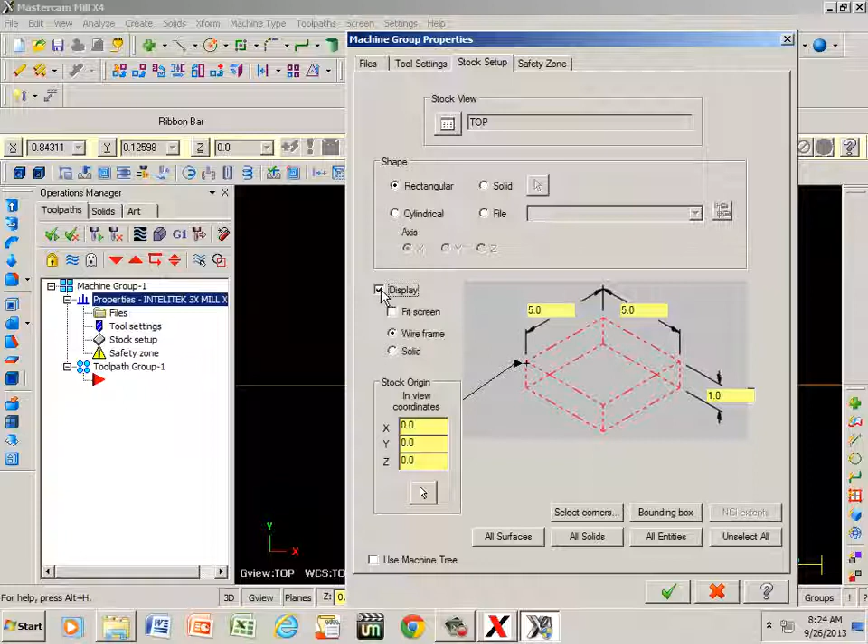I'm going to make a 5 by 5 by 1 inch thick. So if I just type in 5 tab, 5 tab, and 1 tab, notice that my origin or place of reference is in the center. So if I click here, I'm going to be machining off the bottom left corner, or programming from bottom left corner. Now I want to click on display and green check.

Now if I take the roller on my mouse and roll it back toward me, I can center my material in the center of the screen. I'm going to go to create and click on rectangle. Now if I get close to the bottom left corner, watch what happens. It's going to snap right to it. Bam. There it is. I take the left mouse button and hold it down and create a window larger than the red dotted line and click it one time.

Now here is my width or my x-axis, and here's my height or my y-axis. Let's type in 5, tab over, 5 again, tab, blue apply, green check. Okay, what I want to do is I'm going to create a pocket. So the easiest way for me to do that, I want it to be 3/4 of an inch away from all edges. So if I go to create, line, and parallel, right here I can type in 0.75.

And if I click this button here, my distance button, it's going to turn it red. That locks me in. So now if I click this line and go to the inside, do it the same way all the way around. Blue apply, green check. Now I need to go ahead and trim off this excess here. So if I go to my scissors, here's various options I have. I'm going to select this one, divide and delete.

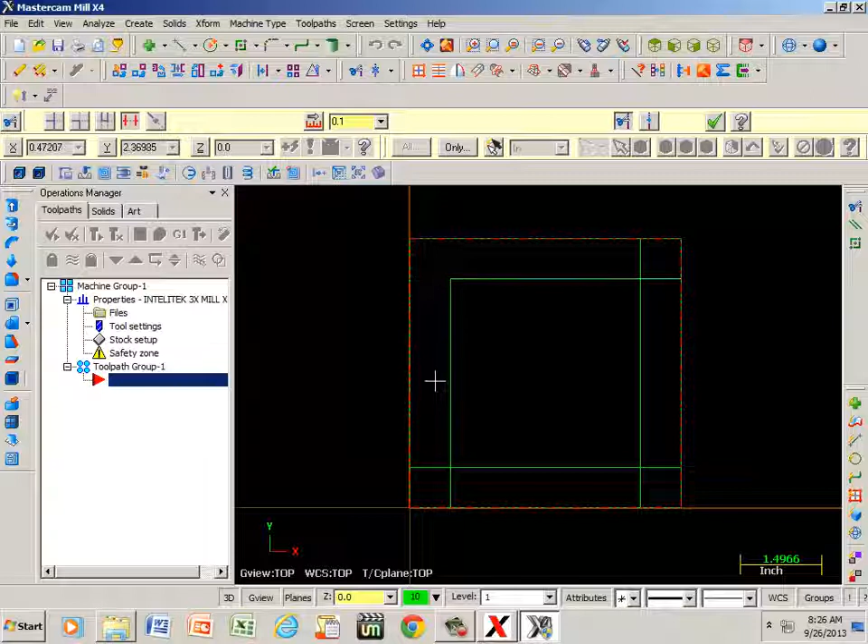So once I click that, I'm going to zoom in with the roller, and you see the dotted lines here. If I click here now, it goes away. There. Green check. Now notice I have right angles or square corners. So if I'm going to machine with the cutter, it's going to leave a radius. So I need to create a radius in these corners.

You do that by going to fillet entities. If you ever hover over anything in MasterCam, it will tell you what it is or what it does for you. This one is called fillet entities. So if I click that, it defaults at 1/4 of an inch. Well, I want these radiuses to be 3/8 radiuses. So if I click here and type in 0.375, I click this button here. Now if I click this line and I go to this line, it creates the radiuses for me. There. Blue apply, green check.

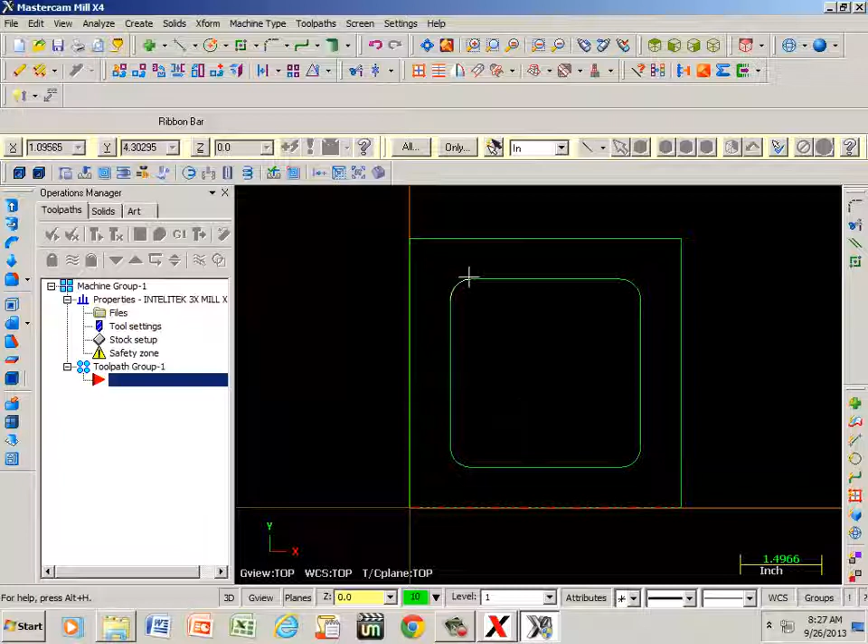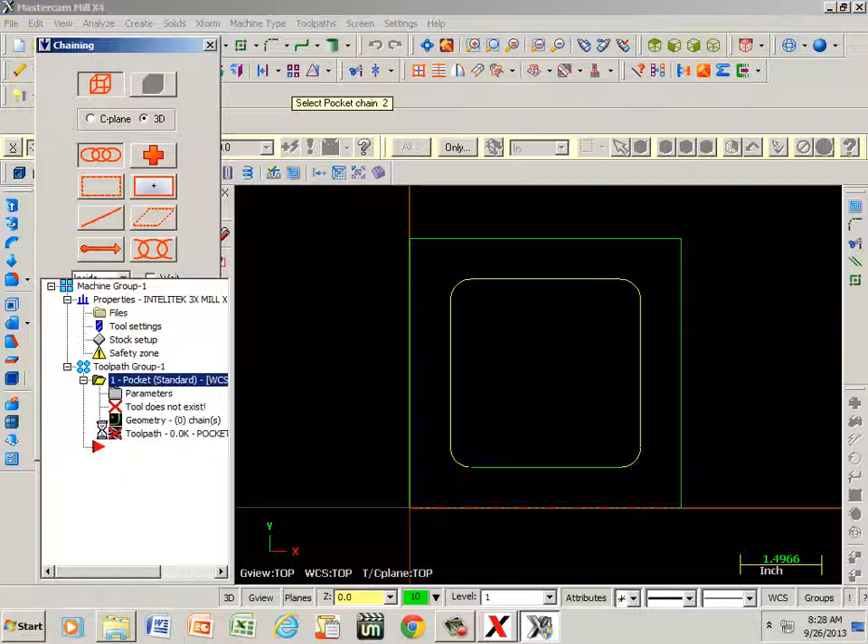Alright, now I need to go to tool paths. I need to pick a tool to machine this pocket out. So if I go to tool paths, scroll down until I get to pocket, and I'm going to name this pocket. That's my operation. Now if I click this line, notice it turned it yellow. That means everything's connected. Green OK. And I need to pick a tool.

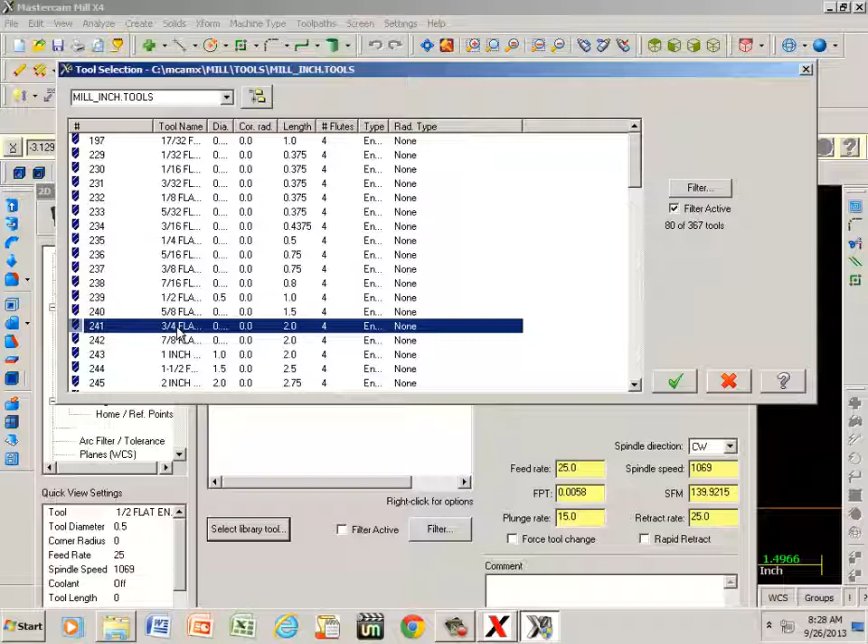Well, since that's a 3/8 radius here, the largest cutter that I could possibly use would be a 3/4 of an inch, or 0.75. So if I go to select library tool, here's my 3/4 flat. I'm going to double click that, and it's showing tool number 241. Well, I don't have 241 tools in my carousel on the CNC machine, so I know that my 3/4 cutter is tool number 7. So if I double click this, I can change that number.

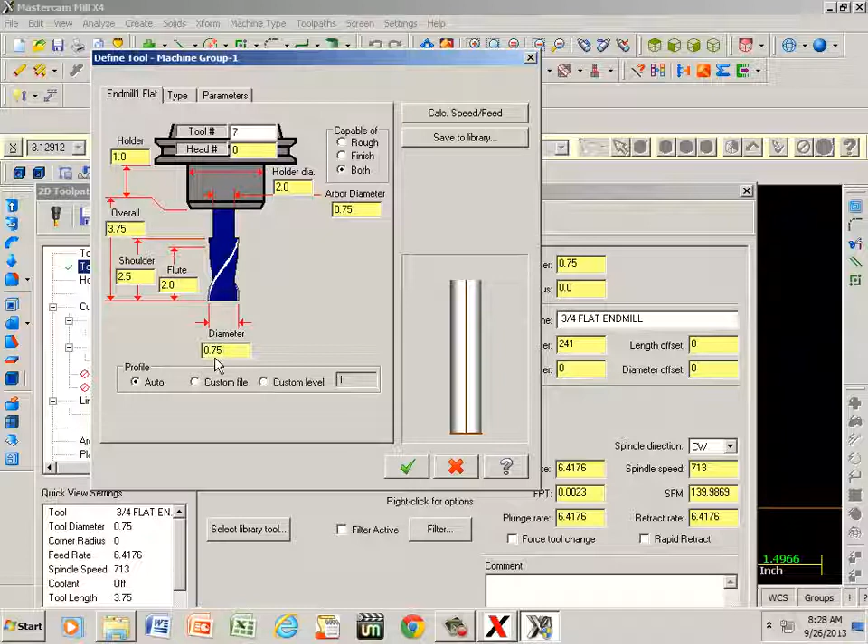Notice that we have 3/4 of an inch here. So we're still using a 3/4 cutter, but I renamed it tool number 7. We go to cut parameters, showing that we're climb milling, which is what I want. We are roughing, and I can pick whatever style I want. The fastest way of machining a pocket would be to go to true spiral.

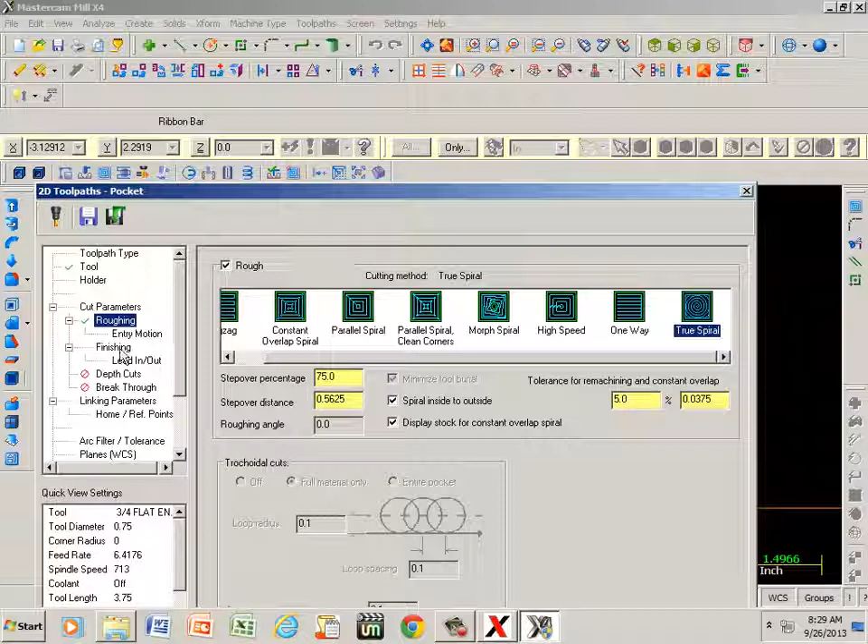So if I click on that, and I go to finishing, actually entry motion, here's helix and ramp. Helix is going to zigzag back and forth until it gets down to my depth of cut. Ramp goes 2 or 3 axes at the same time, simultaneously. As the Z is coming down, it's moving also in my X and my Y, or one of the other.

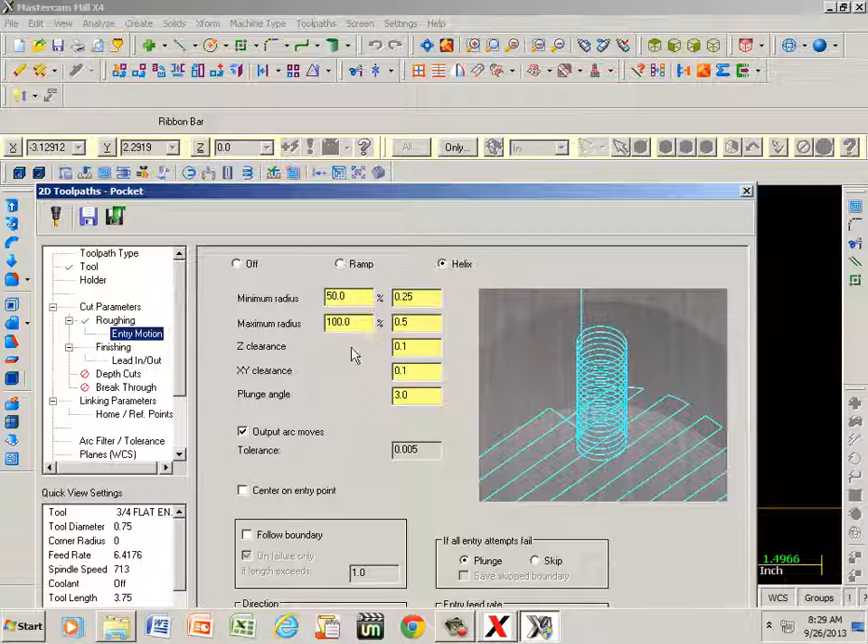Finishing is going to leave one pass, and it's going to save me 10 thousandths worth of material for cleanup. I can change that if I want to. I can change that to 50 thousandths or 2 passes at 25 or whatever.

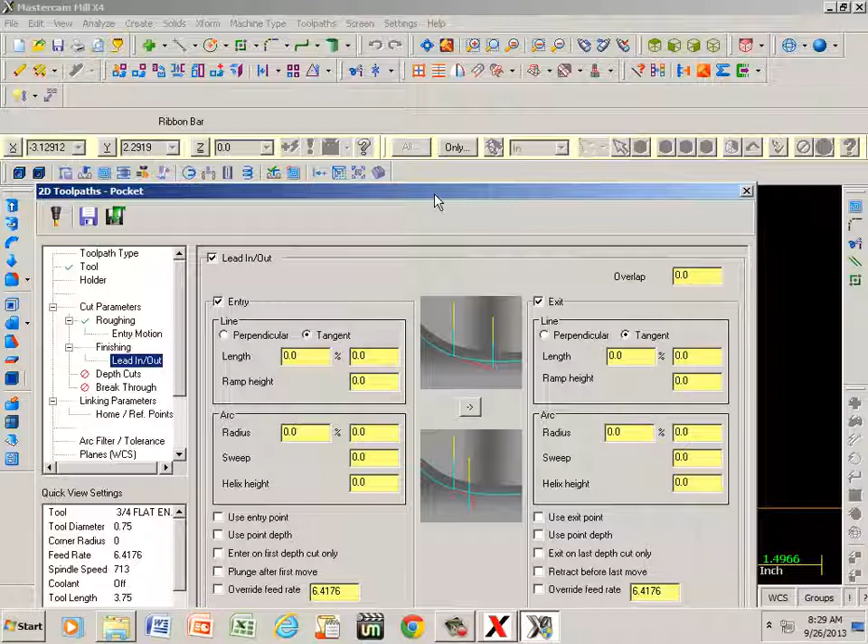Lead in, lead out. What that means is, as the tool is coming in, it leads in, it machines all the way around your pocket, and then it leads out, it goes down another 100 thousandths or whatever you want to take it, leads in, goes around, and leads back out. I'm not going to use that, so I'm going to uncheck it. It grays everything out now.

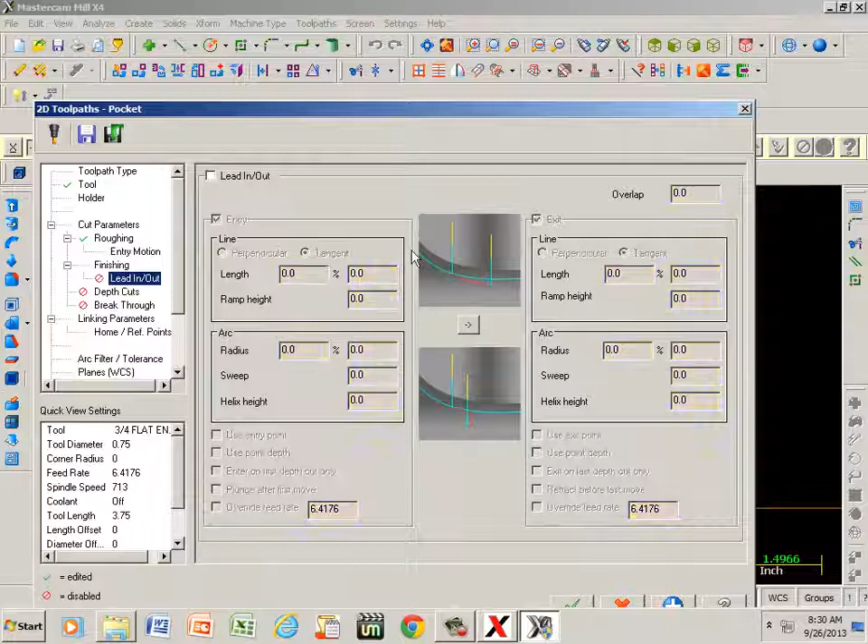Depth of cuts. I'm going to click that and tell it I want to go 100 thousandths per cut, 0.1, or I can give it more zeros if I want to. That's not going to change the value of that number. I'm not going to break through. I want to leave a pocket in there, so that's not even going to be an option.

Linking parameters, that's going to give me my total depth. Okay, we said that that's going to be 1 inch thick. I'm going to machine this 3/4 of an inch deep. So that's going to be minus 0.75.

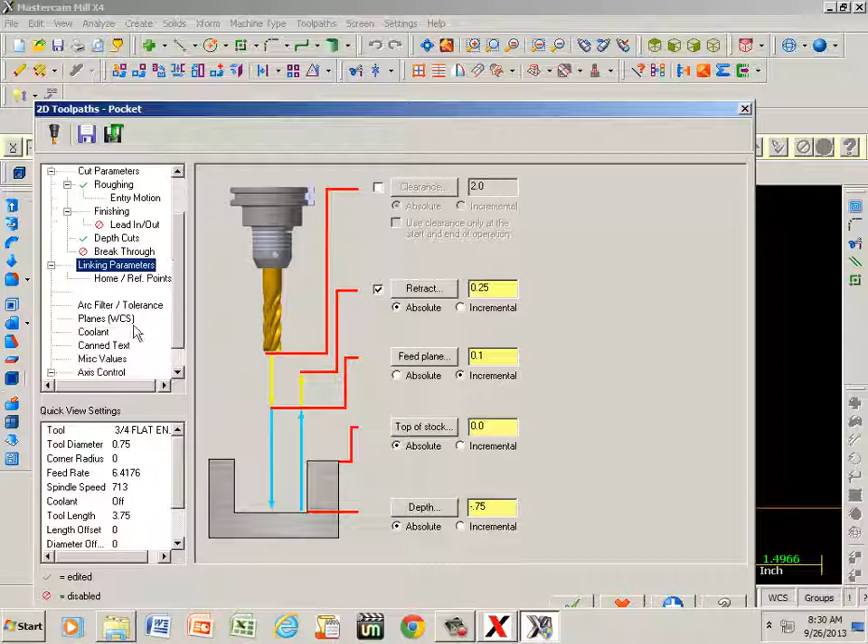If I want to turn some coolant on, I can go ahead and click on coolant and click on flood and turn that on. Well, everything's done. So I hit blue apply, green check. Here's my tool path. A lot of times that gets in your way, so you can hide it by hitting Alt-T on your keyboard.

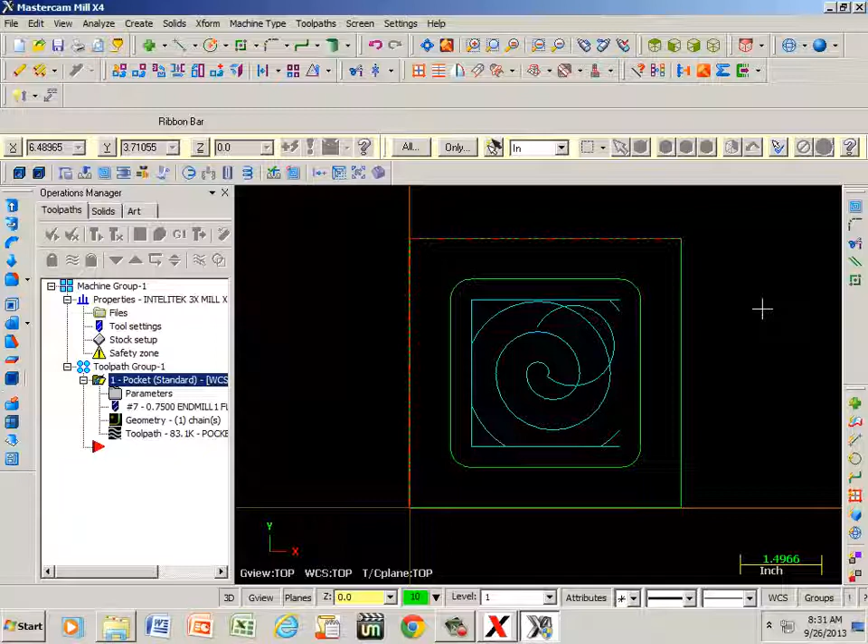One time shows me where it's going to start and machine around. One more time will hide it. Let's go to an isometric view. If I hit Alt F1, that's 100% zoomed in. I'm going to back off of it 25% by hitting Alt F2. Now here I can hit my verification and machine.

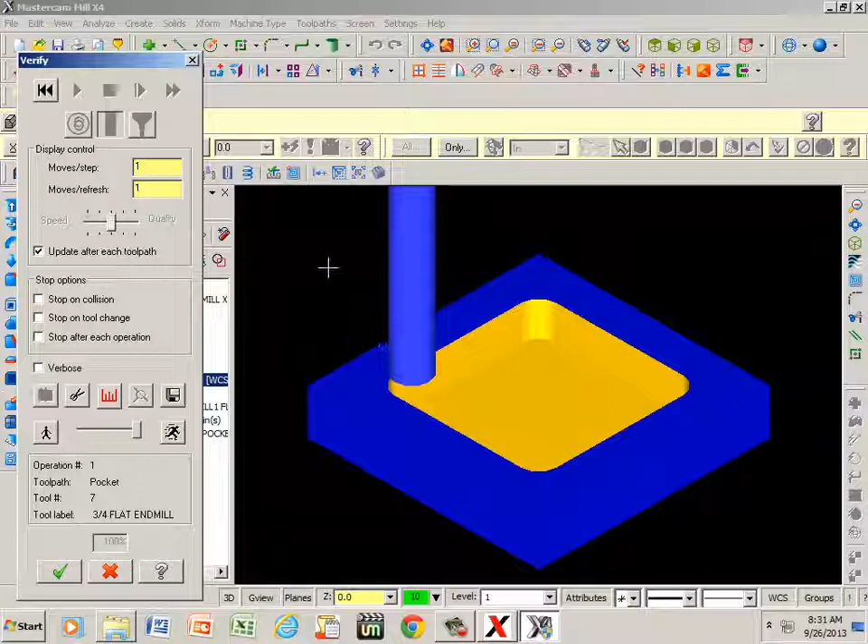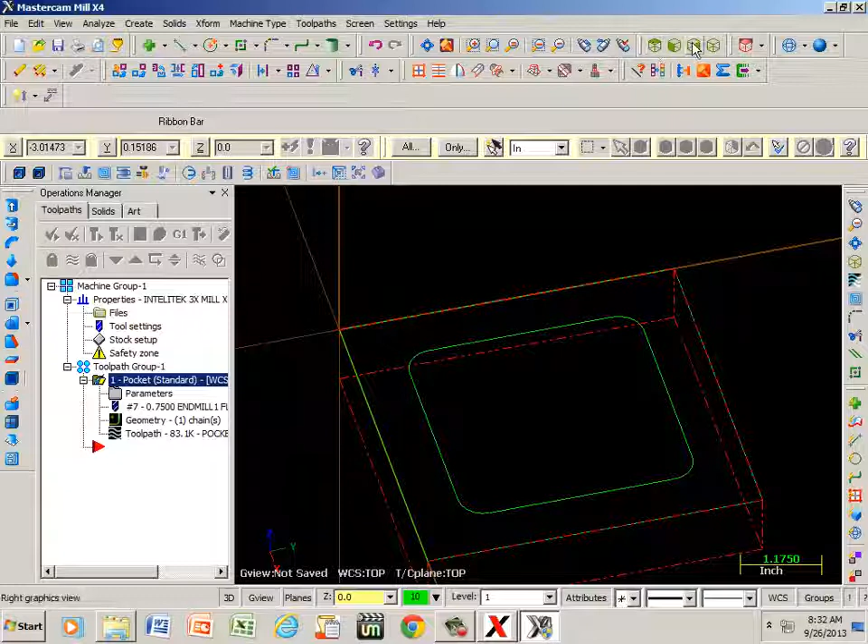If I hit right mouse, I can go to dynamic rotation and take a look at it, make sure I didn't break through, or zoom in and look at my radiuses, see what kind of finish I'm leaving. Everything looks good, so I'm going to hit green OK, and back to my isometric view, and let's go ahead and generate code. So if I hit G1, green check, it wants to save it under an NC file.

I can save it there, or I can save it to my desktop, or I can save it to a flash drive, or whatever I want. I can do that by going here. Here's a USB. I'm just going to save it under my documents. Actually, I think I'll just go ahead and leave it in NC and hit save.

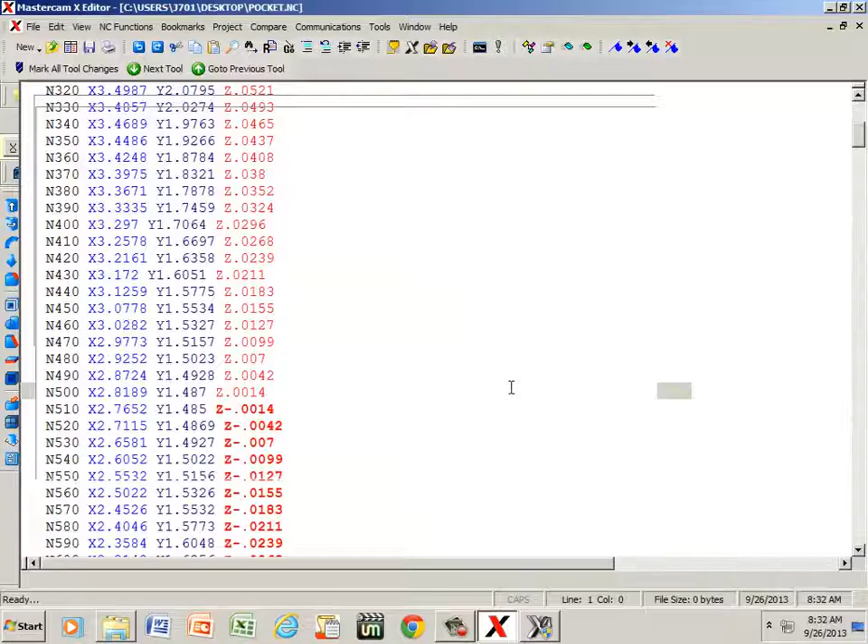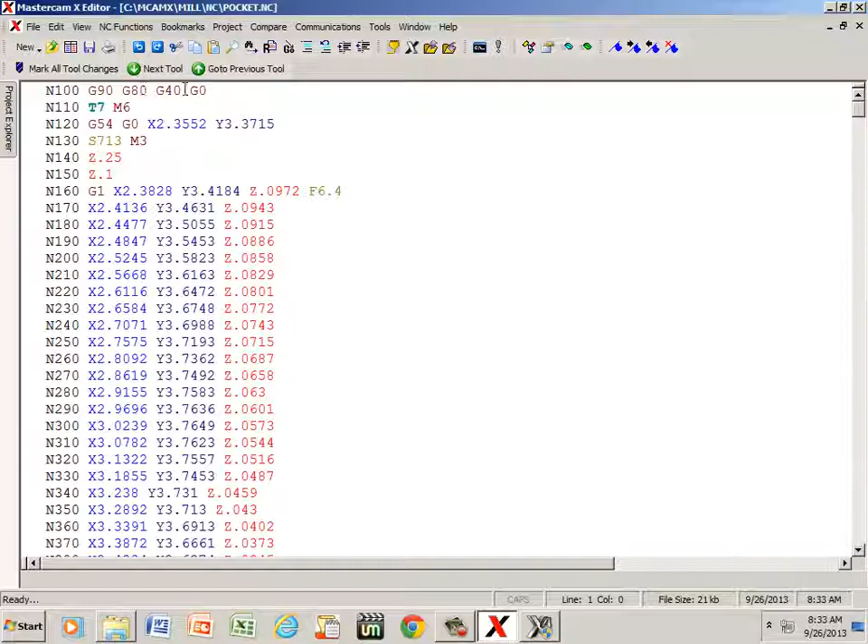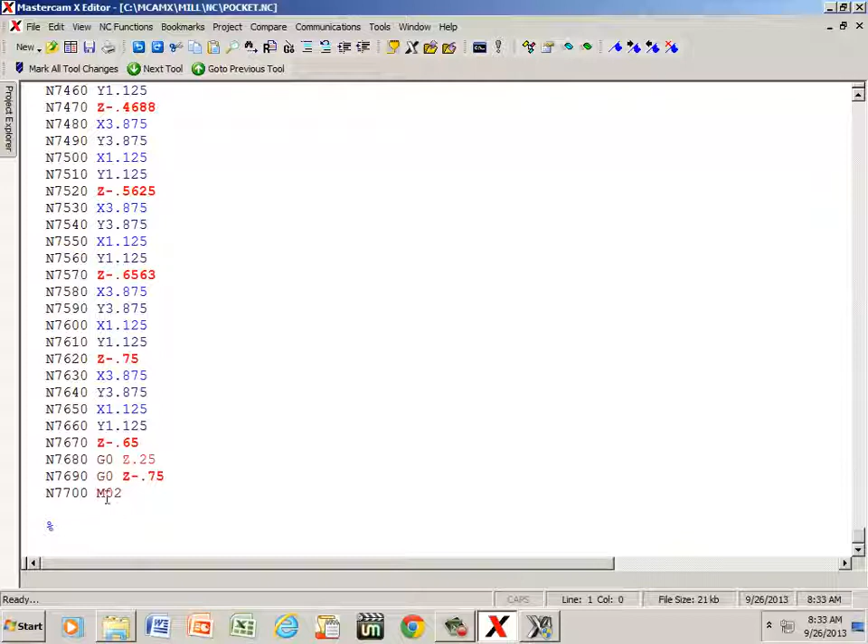Now here's the code. Starting off with G90, absolute programming, it's got various other codes that we will discuss later: your G80, your G40, and G54, tool offsets, things of that nature. Scroll all the way down. M2 ends the program. Everything looks good. I'm just going to minimize this and we will continue with another video after this one.